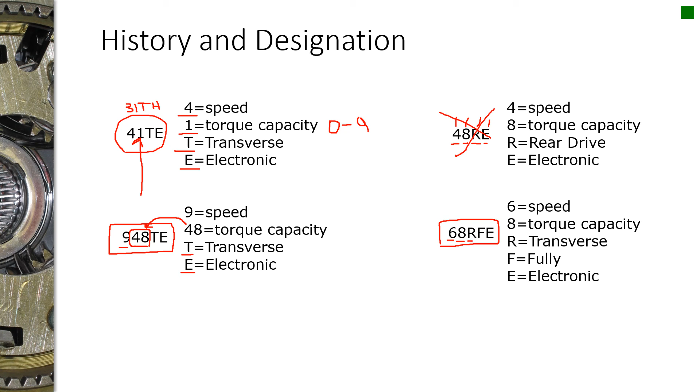I put this one up here because they replaced this 4-speed transmission with the 68RFE. It's a 6-speed, relative torque capacity of 8, rear-wheel drive, but they threw this F in here, and the F means fully. So the 48RE was an electronically controlled transmission, but it wasn't fully electronic - it had a throttle valve still.

Actually, the 48RE had an electric motor externally mounted, but like the 47RE and 46RE, the 44 and 42REs, they had a physical cable that went up to a throttle actuator, which changed the throttle valve in the transmission. So when they got rid of that cable, they added the F - instead of calling it 68RE, they call it a 68RFE, to let you know that's fully electronically controlled.

So it's a little confusing. I think when they went to it, they said, okay, we're going to have this common naming structure, and then as it went along, they kind of had to fall away from their common naming structure because they wanted to be clear.

And they've got other transmissions like the 42RLE. 42, 4-speed, 2 is the relative torque capacity, rear wheel drive is R, L longitudinal, so it's front-rear facing, and then E electronic.

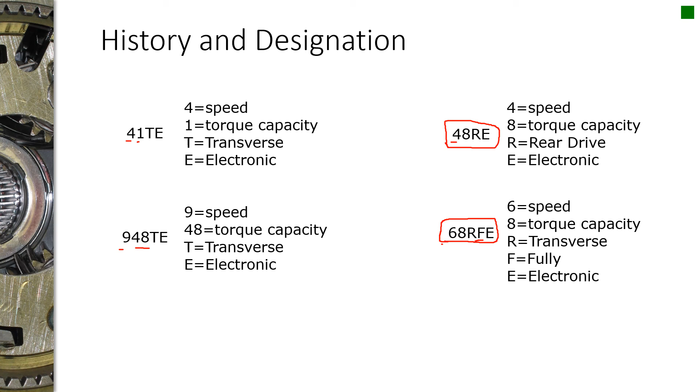But the big thing is that first number is the speeds, and the second number is going to be its relative torque capacity, whether it be 2 digits or 1. And then it's going to be transverse or rear wheel drive, or longitudinal if it has an L in there. Then E just means it's electronically controlled, which pretty much anything is going to be unless you get real dated with your stuff.

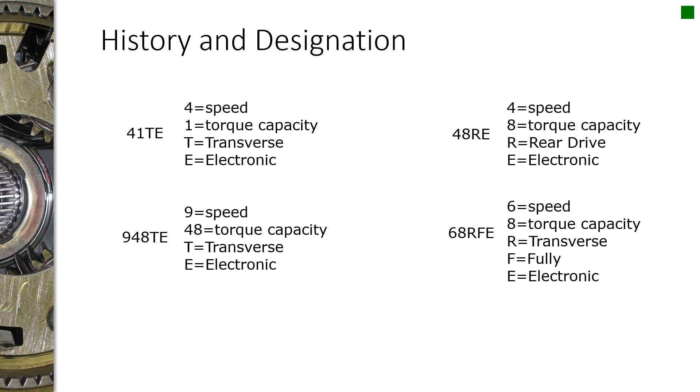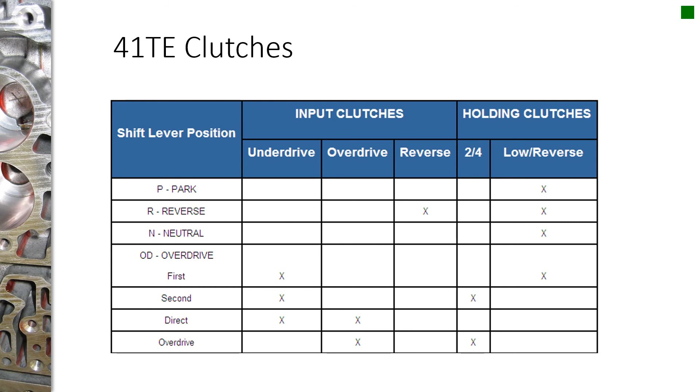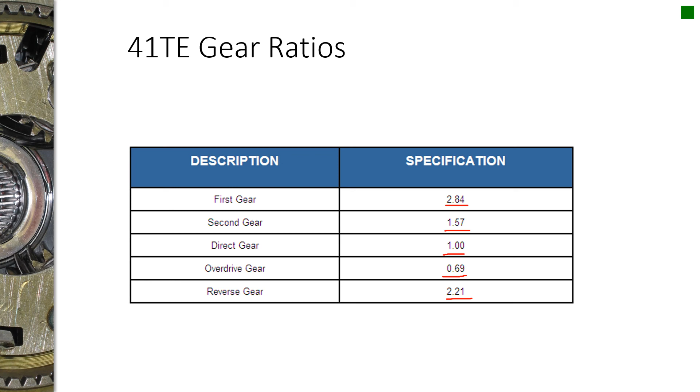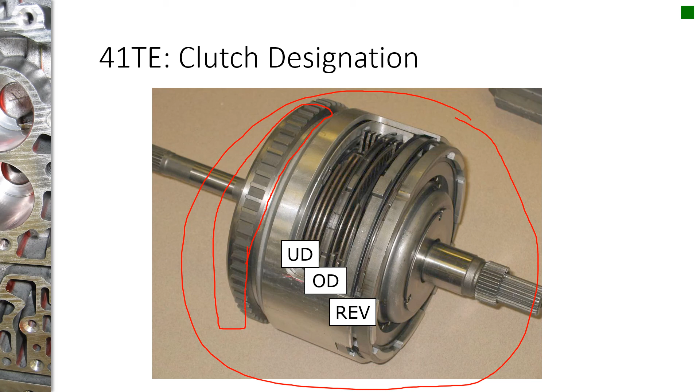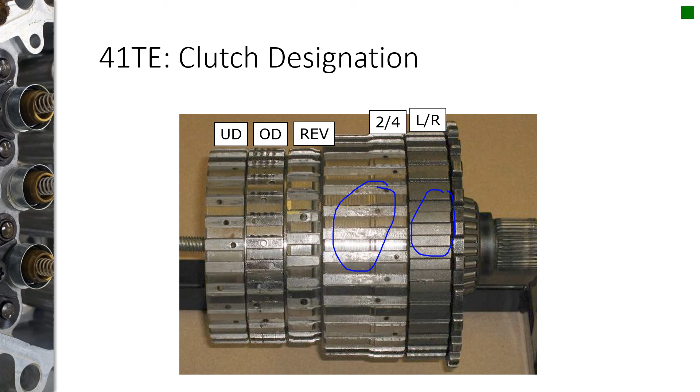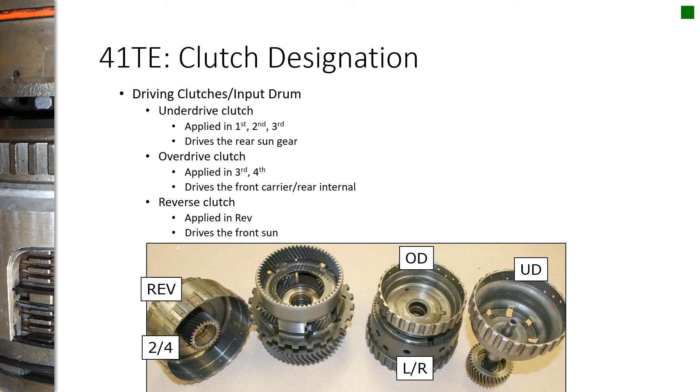As far as the holding clutches, this is the same picture we have on the bottom, but if you notice on the previous slide, I didn't mention the low reverse and I didn't mention the 2-4, because those are holding clutches. Those are going to take these gear set parts and lock them to the transmission case. Going back to those planetary gear set rules - if you input one part and hold a part, that third part's going to be the output, and it's going to be at some kind of gear reduction, overdrive, or reverse.

So looking at the 2-4 clutch, it's applied in second and fourth, and this larger set of splines that we have right here is going to house the friction discs. The friction discs are going to lug onto those splines, and when the 2-4 clutch applies, it's going to lock this front sun gear to the case.

Now if we look at the low reverse clutch assembly right here, it's got a larger set of splines as well, because they will take the friction discs between these set of splines and the transmission case. That's actually the very bottom set of clutches when we take this transmission apart. When that low reverse clutch applies, which is done in first and reverse, we're going to lock this rear internal, which is the back half, the rear internal, and the front carrier, which should be on the front half of the gear set. We're going to lock that to the transmission case so it can't move.

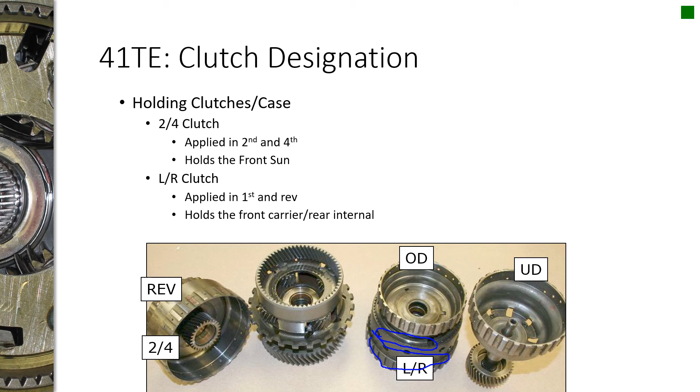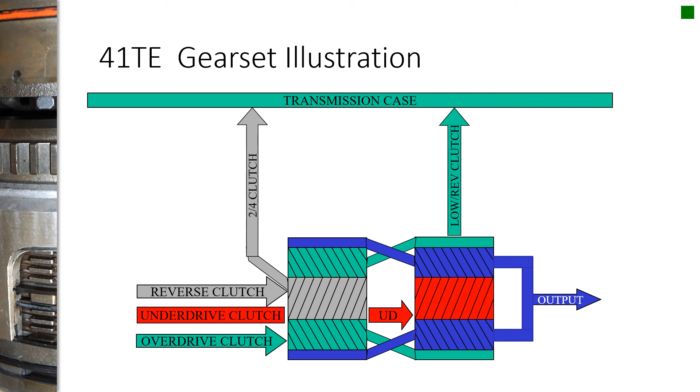But I'm going to go through and build it up piece by piece here on these next slides. As I mentioned before, our driving clutches are these three coming in from the left. The arrows coming in basically mean that my engine torque has the ability of literally driving those clutches through the torque converter. And then my holding clutch is the one showing arrows pointing towards the transmission case.

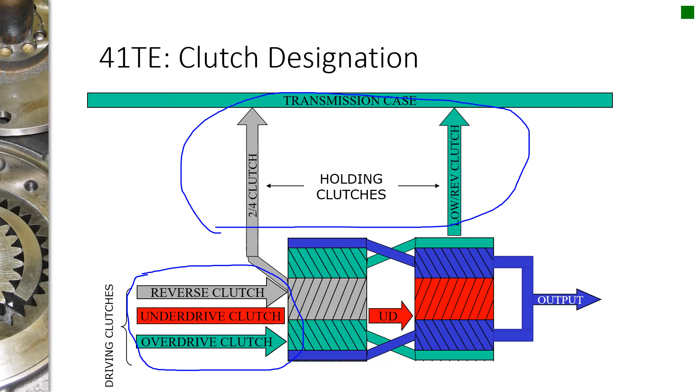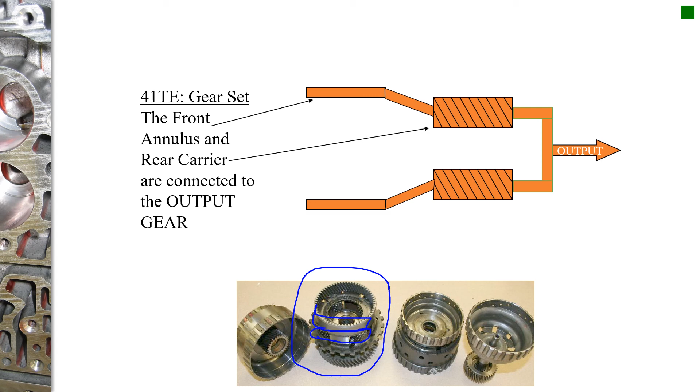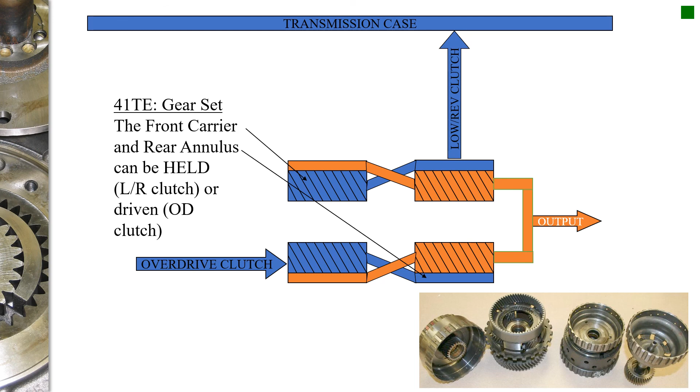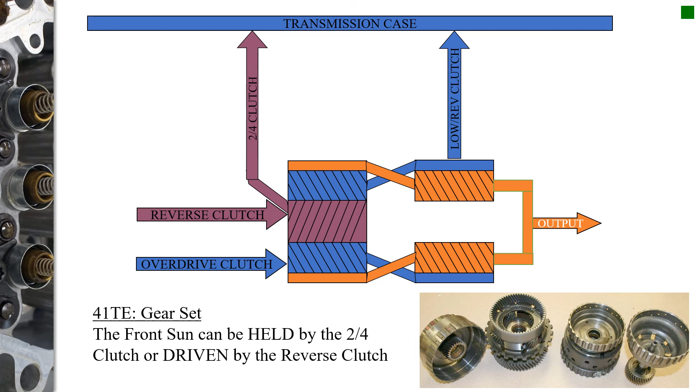Now the thing is, when I cover power flow on this transmission, it's much easier to explain using this drawing than trying to show it using just a big chunk of metal sitting there, especially when you have it all together. All you see from the outside are these splines, and you don't have any reference to what part of the gear set it's drawing unless you memorize that. So on these future slides coming up, where we go through power flow, I'll be able to point out what gear sets are being driven, what's being held.

For every gear except second gear, they're really only using either the front half of the gear set or the rear half. So it's really simple, it just comes down to a simple planetary gear set. Those rules we followed, where a small gear driving a big gear gives a gear reduction, a big gear driving a small gear gives an overdrive. If you ever hold the carrier, you're going to get reverse. Just these little planetary gear set rules - if a carrier's output, you're going to have underdrive; if a carrier's input, you're going to have overdrive. So it all really breaks down to some of those simple gear set rules, and we'll see that here on these power flow discussions coming up.

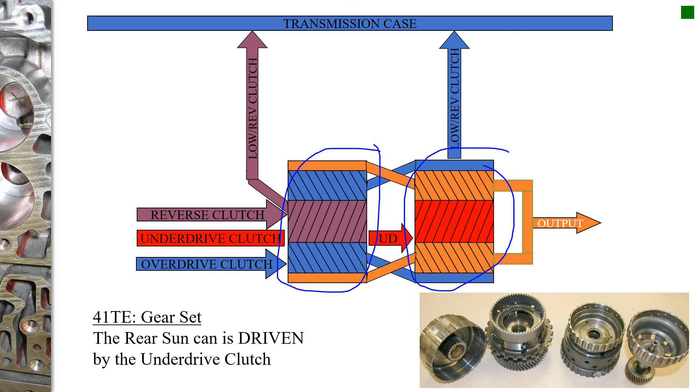So this transmission here is shown while we're in first gear, and the only thing that's applied is our underdrive clutch and our low reverse clutch. So torque comes in and drives this rear sun gear, and then we hold our rear annulus. So our sun gear is input, our carrier is output, and our internal gear is held. Hard to draw with a mouse, but it's a small gear driving a big gear. That's the best gear reduction we can get, or the smallest gear driving the biggest gear - that's the best reduction we can get, and that is what we use for first gear.

This front gear set, if you remember one of those gear set rules, said that if you have something applied or driven but nothing held, that's neutral. You have to either have two parts input, or something that's input and something that's held. Because if you have two parts input, you have direct drive. If you have something input and something held, you've got a gear reduction or an overdrive or something like that. But if you have something input and nothing held, that gear that's not being held is just idling along - it doesn't have any torque transferring through it.

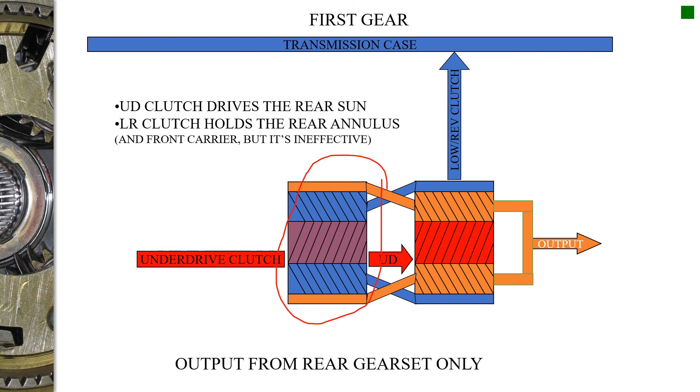Second gear is the most complicated as far as trying to understand power flow, but if you think about it: in first gear, my sun gear is input and my annulus is held. In second gear, all I do is activate this front gear set to let my rear annulus start to rotate a little at a certain speed. By not holding it directly, I steal a little of that gear reduction away, and that gives me what I have in this transmission as second gear.

So now here we are talking about second gear. Output is from both gear sets, so I need every gear in this assembly to work. When I was in first gear, I could literally be missing parts of my front gear set and still have first gear. But in second, I need everything available, because I'm holding a part of my front gear set through my 2/4 clutch, yet I'm still driving a part of my rear gear set through the underdrive clutch.

As I mentioned, in first gear this part was held, but now it's not held anymore—it's going at a bit of a gear reduction, rotating with the input shaft but not at input shaft speed. The rear sun gear is going input shaft speed, whereas the rear annulus gear assembly is going something less than input shaft speed. That causes the rear carrier assembly to rotate at a gear reduction, but not as good a reduction as first has.

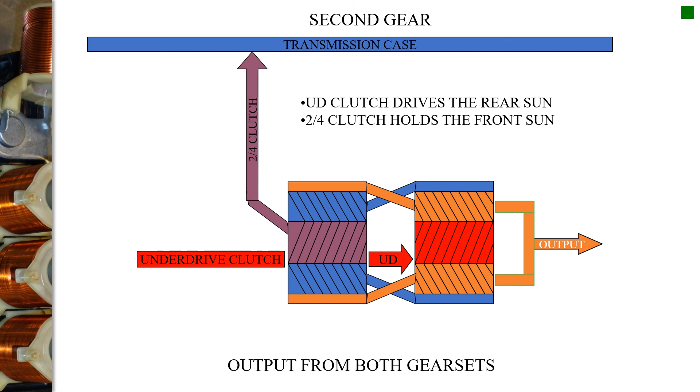Third gear is pretty simple. If you remember direct drive on a transmission, you have two parts input and nothing held. That's why we don't see anything connected to the transmission case here. I still have my underdrive clutch applied—even though they call it underdrive clutch, third gear isn't underdrive—and I'm literally driving my sun gear like I did in first and second gear. But now, after releasing the 2/4 clutch, I take my overdrive clutch and drive the front carrier rear annulus assembly.

So my rear annulus assembly is going input shaft speed, and my rear sun gear is going input shaft speed. That forces the rear carrier to go input shaft speed. I put that as output, and since the rear sun and the rear annulus gear are going the same speed, it forces the rear carrier to go the same speed—and that's direct drive.

And if we also stop, the way they achieve that is by releasing the 2/4 clutch and applying the overdrive clutch. That is the two clutches that they deal with when we shift from second to third.

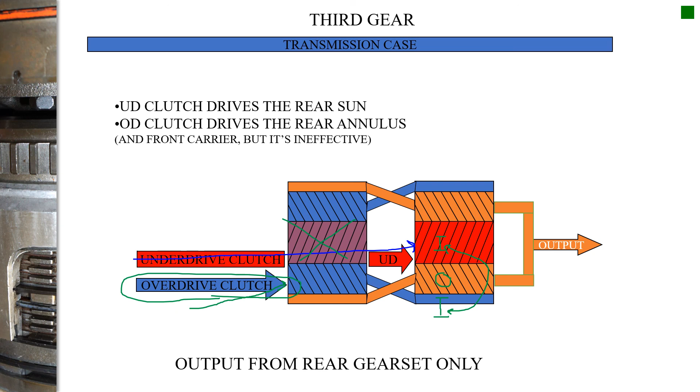Now we're in fourth gear, and the two clutches that they deal with for fourth gear is they will release the underdrive clutch, so now this isn't doing anything, and they'll reapply the 2/4 clutch.

And if we think of what half of the output is coming from, in this case it's going to be from the front gear set. So here I've got my front gear set. I'm holding a part of the front gear set with my 2/4 clutch. I am driving a part of the front gear set with my overdrive clutch, and then my output is going to be my front annulus assembly.

So in this case I could actually be missing parts of the rear gear set and I would still be able to get fourth gear, because all the planetary action that's occurring is coming from the front gear set, and it's just done with the sun gear held, the carrier as input, and the annulus gear as output.

This also goes back with our gear set rules. If the carrier is ever input, overdrive must result, and the reason why is because it's the biggest gear in the gear set. I know it's located inside the annulus gear, but it acts as the biggest gear in the gear set.

So if I'm ever having my overdrive clutch as the input, I'm going to have an overdrive as a result, as long as I have a different part held.

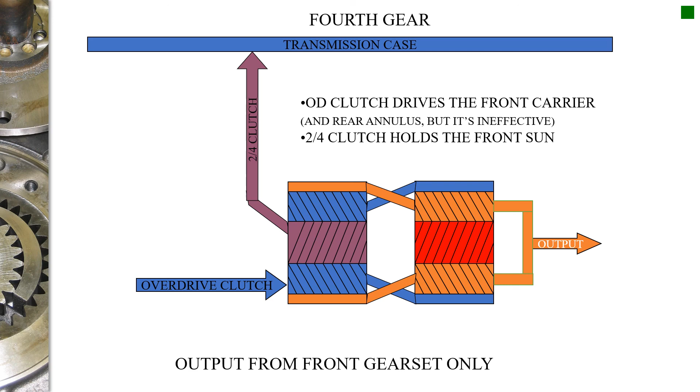And now we finish up with reverse. The output is actually from the front gear set on this, and this could be confusing to some because when you look at this, you're saying, wait a minute, I'm holding a part of the rear gear set here with the low reverse clutch.

But if you remember, everything that has the same color is the same connection here. So we're holding the back of the gear set right where the rear annulus is, but it's also connected to the front carrier assembly. And if you remember that planetary gear set rule, that if the carrier is held, reverse must occur, that's what's occurring in this transmission.

We're using the front half of the gear set. Our front sun gear is the input. Held is our front carrier assembly through the low reverse clutch, and then output would be our front annulus gear. So all of this action occurring in reverse is happening on the front half of the gear set.

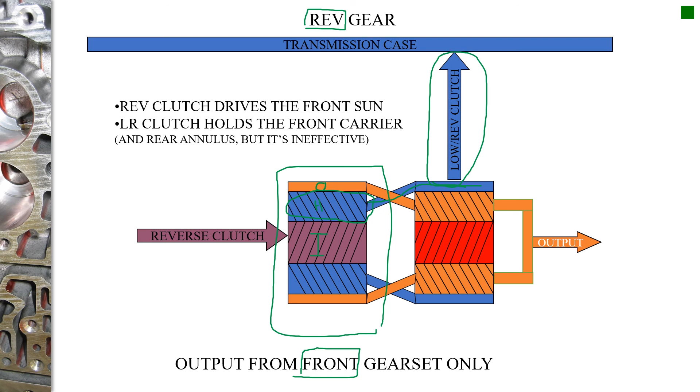So just as a recap, we have 3 driving clutches: our reverse clutch, underdrive, and overdrive clutch. Those are all located in the input drum assembly. And I have 2 holding clutches, and those clutches are located in the transmission case, and they are going to hold a gear set part, preventing it from spinning.

My low reverse clutch holds on to the rear annulus and the front carrier. The 2/4 clutch holds on to the front sun. Reverse clutch drives the front sun, underdrive clutch drives the rear sun, and my overdrive clutch drives my front carrier rear annulus assembly.

5 clutches, not too difficult to understand. No rollers, no one-ways, sprags or diode-type, ratchet-type clutches, nothing fancy, no bands. So it's actually a really simple, compact transmission.

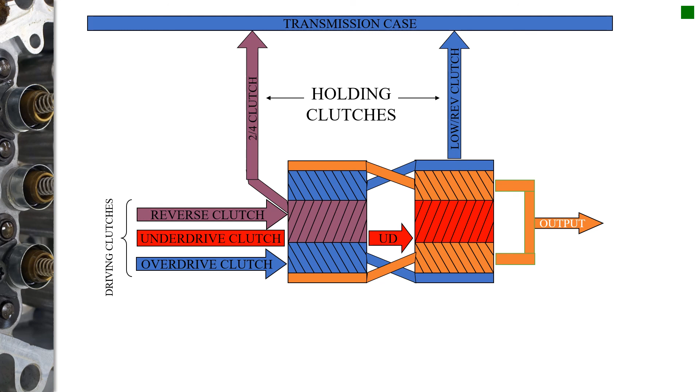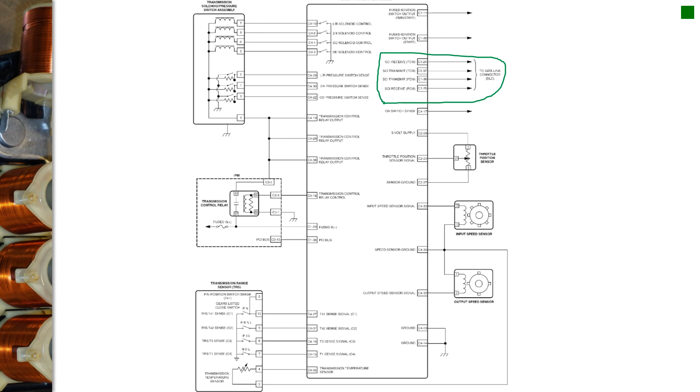But these transmissions throughout the years have pretty much used the same inputs and the same outputs, so even if I had a modern drawing, it wouldn't have changed. The reason why I like to use this one is because it puts the whole schematic with just the transmission related stuff on one page. So what you're going to see on these next slides is I'm going to have call-outs where I'm pointing out all these different little aspects of this schematic, and we'll talk a bit about them individually.

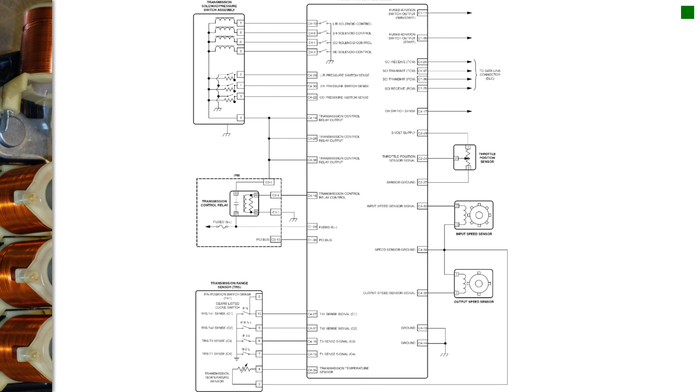As far as scan data and doing diagnostics, a lot of times the PCM will include the transmission functions. Sometimes you'll have a separate TCM. The earlier 41TEs used to have a separate TCM, and then around 2000-ish, the next generation controllers included the TCM functions in the PCM. That's pretty typical, pretty common. But with any given vehicle, you could find it's got a separate TCM and they just communicate to each other through a network, and that is what makes a difference between an ECM and a PCM.

If I have a PCM, typically you're going to have the engine control and transmission functions in that one module. If you have an ECM, you should have a separate TCM. ECM is engine control module, TCM is transmission control module. But regardless, it doesn't make a difference.

This is a topography that you would see using something like wiTECH, the Chrysler, Fiat Chrysler scan data. Here we can see we have a PCM, and they do have a TCM listed, but it's grayed out. If it's grayed out, that means it doesn't come with a TCM. So maybe they had a transmission option for this vehicle that utilized its own separate TCM. But in this case, we have a PCM, and it's going to include our transmission functions.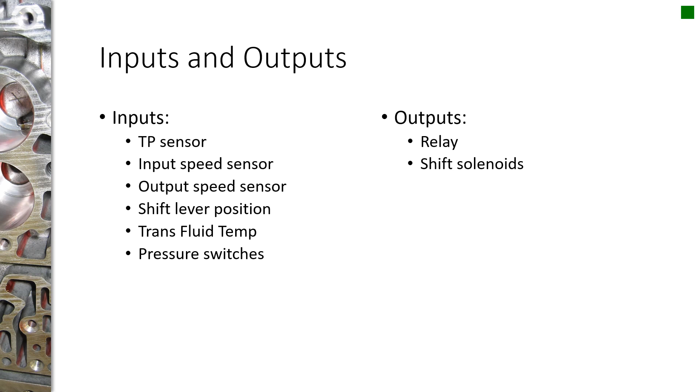If we were to start with the throttle position sensor—and you guys have, I'm sure, learned all about these things in previous classes, so we don't need to spend too much time on it—on a throttle position sensor, you're going to have power going to it, 5 volts in, you're going to have a ground, and then the little wiper blade on there sweeps across this resistor assembly, and depending on what voltage it picks up—5 volts, 4, 2, 1—depending on where it picks up on that voltage drop is going to be an indication of what your throttle position sensor signal is.

And how does it affect transmission operation? It has a big influence over its shift timing and the shift quality.

The difference between those two is the shift timing, which would be like miles per hour, as in what MPH did the transmission shift. You can imagine a throttle position sensor provides input on how much throttle you're giving it. So if I'm driving around giving it 10% throttle, my upshifts are going to be relatively early since I'm not looking for performance, just cruising through town. Whereas if I'm at 90% or 100% throttle, it's going to let the engine RPM climb much closer to its red line, its peak power and torque curves.

So the throttle position sensor is kind of an input to the load we're placing on the vehicle, and it will delay our shifts accordingly based on that. Shift quality is going to be along those same lines - it's the feel of the shift. Is it harsh? Is it soft? So when we talk about shift quality, we think of the shift feel, slipping or banging in the gears.

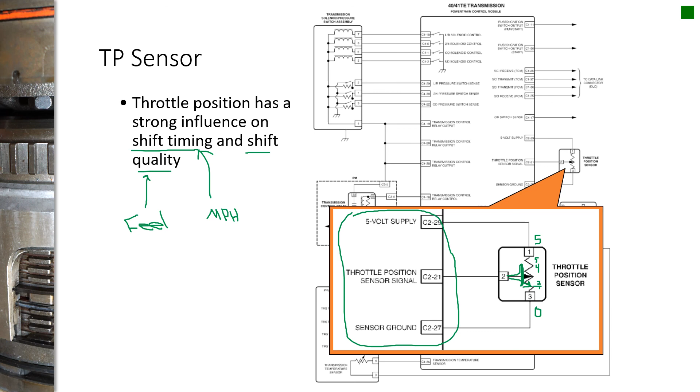As for vehicle speed, they don't have a vehicle speed sensor on this. They have what they call an output shaft speed sensor. So we've got a 24-toothed wheel right there on the output of this gear set. This is part of the output gear set right there, and you can see I've got a speed sensor kind of stuck to it. It's electromagnetic, a 2-wire sensor. So here's my output speed sensor and its wiring.

These little toothed wheels, when they pass by, there's a permanent magnet inside there. When they pass by that permanent magnet, it changes the flux lines, concentrating them or expanding them out when they're in the opening, and concentrating them when that little tooth goes by the tip of the sensor. The fluctuation of the flux lines in and out induces an AC voltage on our circuit. What the computer does is count the pulses - 1, 2, 3, 4 - and it can count how many pulses occur per second and translate that to output shaft speed.

Now here's the thing - different vehicles are going to have different tire sizes and so forth. So there's an adjustment, what they call a pinion factor, and that's a setting you adjust in the powertrain control module so you can correct for tire size differences. Because this output shaft speed sensor doesn't know if you've got tiny little 14-inch wheels, or 18-inch rims with some decent sized tires.

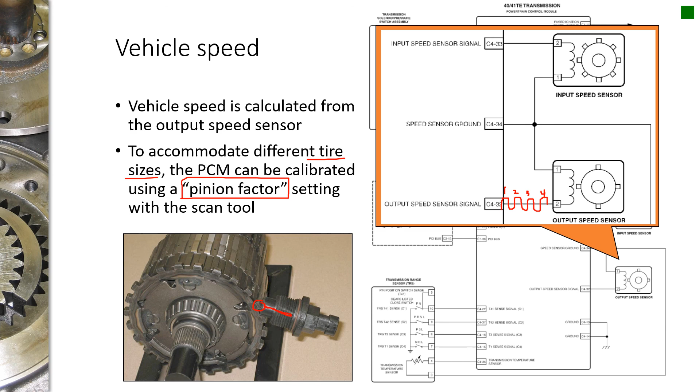More on the speed sensors, we also have an input shaft speed sensor. Same thing, a 2-wire variable reluctance sensor, and it measures off the 60-tooth reluctor ring on the input drum, so we have a direct measurement for input shaft. The input shaft generates 60 pulses per revolution.

The output sensor generates 24 pulses per revolution, and they're both variable reluctance, 2-wire sensors. This actually used to be one of the biggest problems on these 41TEs.

The output speed sensor would fail and just refuse to put out a signal. It was horrible if it did that at highway speeds, because as soon as it failed, it thought you were going 0 miles per hour and it would downshift you into first. There are no one-way roller clutches or sprags, so you actually went to first gear.

But usually the symptoms were at low speeds, where somebody would be driving along and the output shaft speed sensor would fail and drop them into first gear.

We still have these two speed sensors, an input speed sensor and an output speed sensor, but one thing we need to take into consideration too is that we have an engine speed sensor, the crankshaft position sensor, so they can compare engine speed to input shaft speed to figure out what's happening in the torque converter clutch, and then compare input shaft speed to output shaft speed to figure out gear ratios.

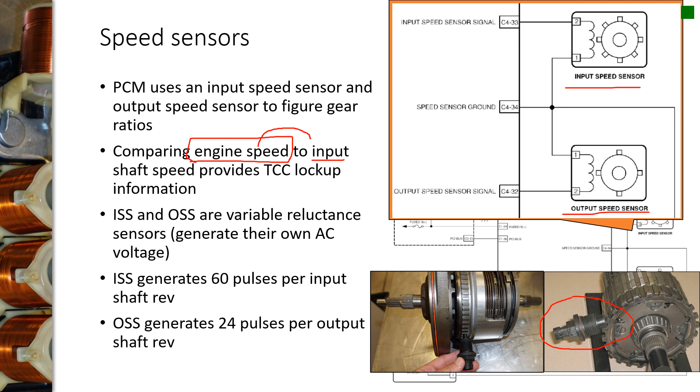These right here are DTCs that will set because of a speed sensor; 715 and 720 identify speed sensor errors. These, 736, 731 through 736, identify gear ratio errors. So 731 would be a gear ratio error in first, 732 would be gear ratio error in second, and so forth, with 735 or 736 for reverse. They've got all the gear ratio error stuff figured out through these codes.

The way they're figuring out these gear ratio errors is by looking at the input speed and the output speed. When they command, say, first gear, and it should be 2.73 or whatever, if it doesn't get that ratio, it knows there's something slipping, and it'll flag a code.

The 740 is a torque converter clutch circuit or failure code. If you have one of these codes, like a gear ratio error code, you'll almost always have this right after it, or along with it: P1790, fault after shift. If you have a gear ratio error, it'll set a 1790 as well, which basically says we commanded a gear, it didn't work, and we didn't get the gear ratio we expected, so we got a fault after a shift.

So really, when you look at this diagnostics, you're going to be looking to see whether you have a gear ratio error, a pressure switch problem, or something else occurring that's causing a problem.

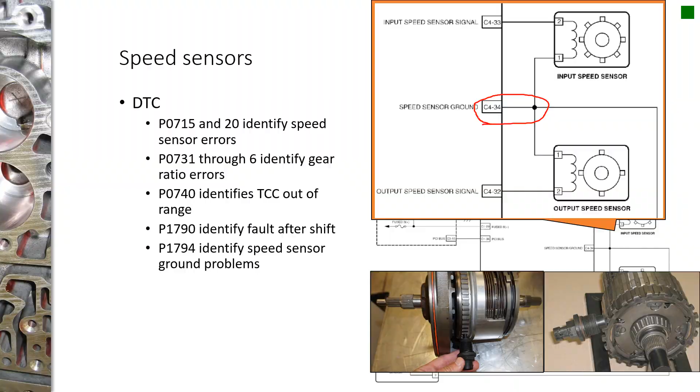These next slides talk about the transmission range sensor, and what the range sensor's purpose is to let the computer know what range we've selected: park, reverse, neutral, drive, low, so forth. And also the transmission fluid temp, and also give us information for reverse backup lamps and also the park neutral start safety switch.

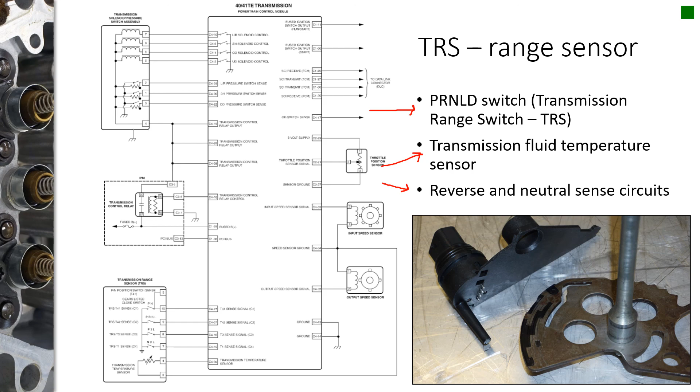On the scan data, we see these 4 circuits here listed as an input, and they're either going to say closed or open depending on the switch state. And it says like T41 C1, T42 C2. The reason why they have both of those is because depending on the wiring schematic you're looking at, they might identify as T41 or C1. So it just kind of makes that simple.

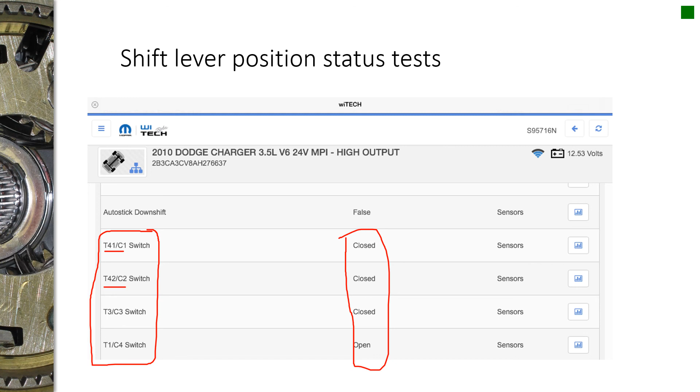But between these 4 switch circuits, we can figure out what manual valve position we're in.

This is the thing that Chrysler or FCA wants you to do when you're diagnosing these 41 codes. It is the very first step of diagnostics, and I bolded or capitalized the word first here. They want you to do this very first, is to go through and do what they call a shift lever position test, because they don't want you to go down a dusty road trying to find a transmission issue when all along you had a bad range sensor and it was telling you that you're in manual second or you're in neutral or something like that, and you weren't actually in those gears.

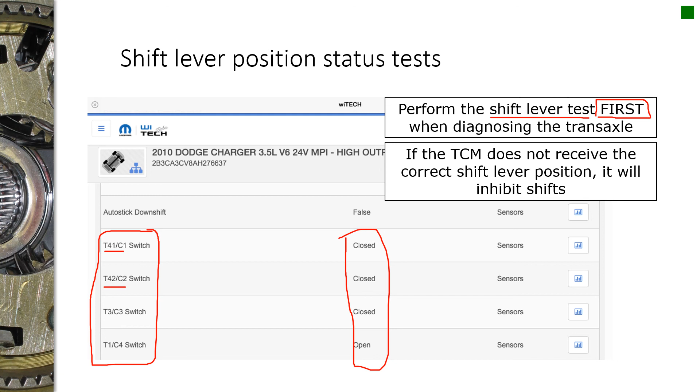So, because the TCM doesn't receive the correct shift lever position, it's not going to give you the gears that you're expecting. If you're expecting overdrive and it thinks you're in 3, it's only going to give you first, second, and third.

There's actually more than one way you can check this. One is the scan data. If you go into special functions or miscellaneous, you can actually do a shift lever position test, and it'll tell you shift into park, hit enter, shift into neutral, hit enter, shift into drive, and they actually have you go through, and then when you're done, it tells you if it passes or fails.

But you could also go through and monitor the switch states and see if they're opening and closing. And thirdly, you could look at the PID that would basically tell you your gear selection and see if it's changing accurately between park, reverse, neutral, drive, all that good stuff.

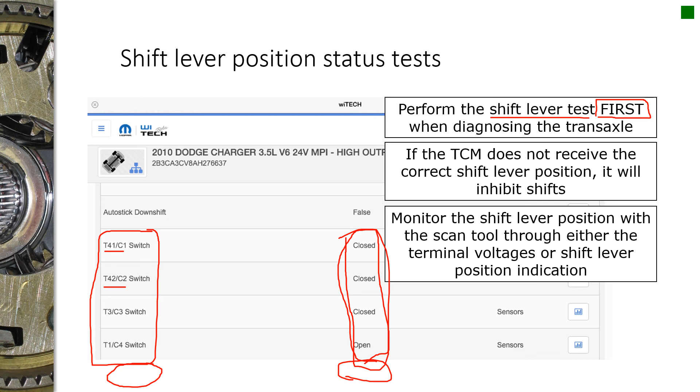But do this step first before you start diagnosing a transmission. Just verify that it's getting the proper signals as far as the shift lever position status.

This is the layout, I guess you would say, of how the switch is set up. It was actually different when these transmissions first came out, but from '96 to the last, when they stopped making this transmission, they pretty much stuck to this little sequence here. Now if you look, I've got what's a sense signal circuit. They put 12 volts and they go through a resistor.

And they go into that little signal circuit. So I'll have 12 volts on the circuit so long as the switch is open. As soon as the switch grounds and I find myself a path to ground, then I'm going to drop all that voltage to 0. So imagine a resistor, 12 volts, a resistor, and then a tiny little voltmeter in front of every one of these circuits.

So every one of these would have a little voltmeter and a resistor. And then if you look on the side here, they will tell you when those switches close. So that'll close in park and neutral. This will close in park, reverse, neutral, and low. This will close in park, third, and low. And then this will close in neutral, drive, and low.

So I get my 4 little switches. If I look at this picture on the side, these are the terminals, and they're like spring loaded with a little plunger on them. And you might not be able to tell, but you can see where they've kind of been riding on this little plate.

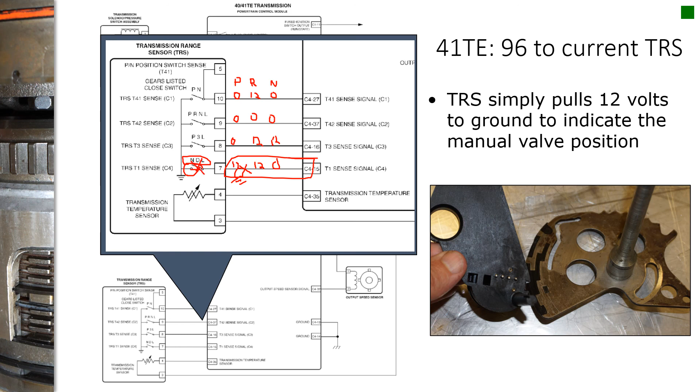So if I'm diagnosing this vehicle and I find that I've got a bad range switch, maybe something's saying 12 volts all the time or something's saying 0 all the time, I might have a bad switch or a short to ground, or if it's staying 12 all the time, I might have an open in the wire or open on the switch. But that gives us an idea of how it works so that maybe we can diagnose it properly.

Like I said, here is the chart: park, reverse, neutral, D3. These transmissions don't have like a D4, D3, D2, and low. They usually have overdrive, D3, and then low. They skip 2 for some reason. I don't really know why.

But now some of these vehicles will have auto stick, so you can go to a manual mode option, but the ones that don't have auto stick and just shift through it, these are usually the 6 options that you get.

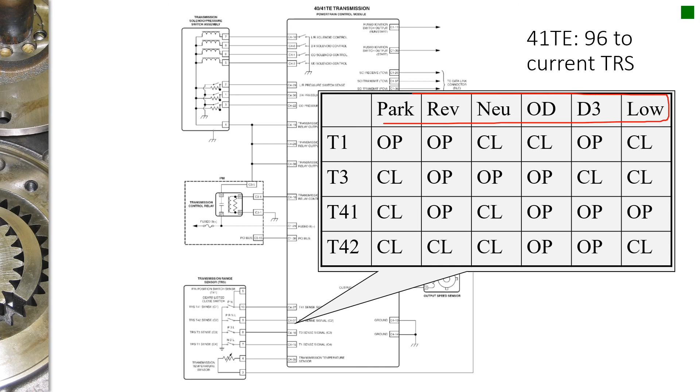There's also a thermistor in there, and I've mentioned that before, but that little stub right there is a temp sensor built into here. So there's a little wire there, a little temp sensor, and that's represented by this on the schematic. So it's a negative temperature coefficient. The resistance drops as the temperature increases, and it will change the voltage on that wire. And based off of that voltage, we're going to be able to figure out what operating mode or what strategy we're going to operate this transmission in.

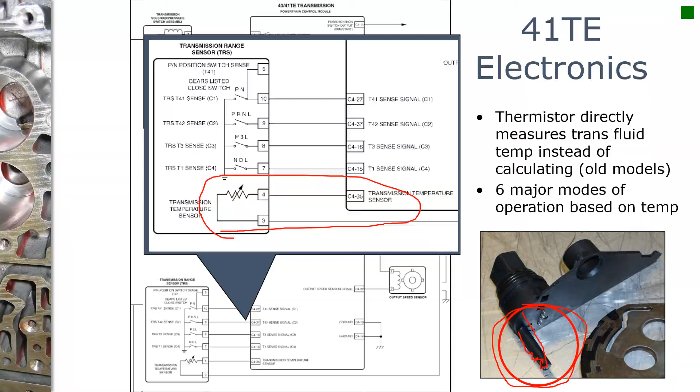These are the 6 basic modes of operation. I know these numbers don't quite line up perfectly, but this is what they've got published in their books, so it's what I have put up here. They've got this extreme cold function and relay open limp mode, meaning they operate this transmission in limp mode, and when they turn the relay off, they turn the power off to all the solenoids, and when you do that, you've got second gear, you got park, neutral, reverse, and second gear.

That's it. The reason why they do that is these solenoids are in such charge of the fluid flow that they don't want to, with it being negative 16 degrees, have the fluid react unexpectedly, and they know they won't be able to control it through the solenoids properly. So they just leave you in second gear. They are not going to try to shift the transmission until you get warm or warmer, because the next phase is cold, and it says below negative 12 degrees Fahrenheit, but I don't know, those 2 numbers are pretty close.

Like I said, this is what's published, but when we jump up to warm, it says 36 to 80. I think it's probably 12 to 35 degrees, which would make sense. Whoever wrote this in their books kind of didn't proofread that, I guess.

In cold mode, it delays their upshifts and has quick downshifts, and they don't turn the torque converter clutch on. You can imagine why - they're going to try to get heat in this transmission and engine as soon as possible.

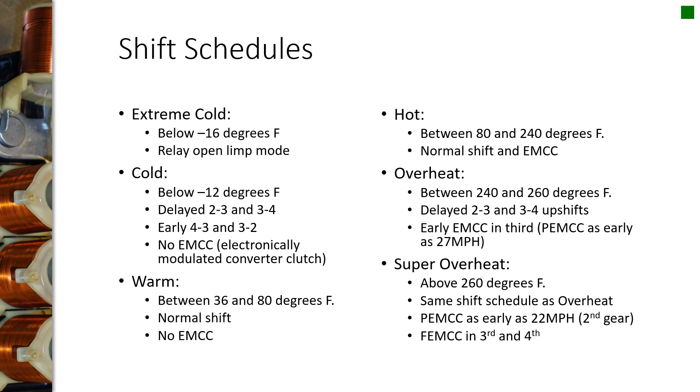And then what they don't have listed here is super duper overheat, and that is when they basically pull the car over, open the doors, and you're supposed to jump out because the car is going to burn down. But okay, so there's no such thing as super duper overheat, but still a lot of different shift temperature modes.

So why would you have improper shift schedules? Well, if you have extreme cold or cold schedules and you're not actually in that environment, you might want to look at the temp sensor circuit resistance. If we have excessive resistance, it's going to translate that to colder temperatures than it probably really is. Now in theory, they do these deltas where they look at this temperature, intake air temp, engine coolant temp, and all these different things, and they should be able to say something's not reading right and set a code.

But if they don't, that's something easy to check just by looking at scan data. The causes for the overheat or super overheat: high engine idle. The only way that would really cause it is if you're sitting in traffic a lot with your foot on the brake and your engine idles high, like if you bump it into neutral or park, it'd be revving up at like 1800 RPM or something. Because if you're sitting there in drive with all this engine speed that wants to occur, you're basically stall testing your converter.

And you're going to be creating a lot of heat in your torque converter. Trailer towing, meaning if you're giving a lot more throttle for just cruising and everyday driving, your torque converter clutch is likely going to disengage more frequently for the assistance, torque multiplication, and so forth. And that translates to extra heat because of what's happening through the torque converter.

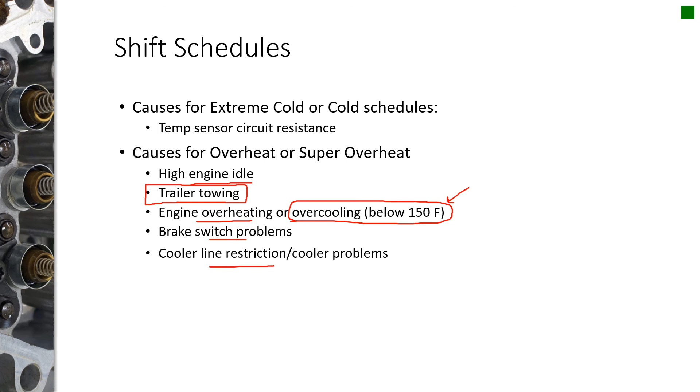But like I said, I don't really see these things, the overcooling part, happening too much. All these other things do make sense, especially depending on how you drive it. Engine idle, yeah, okay, especially if you're in stop and go traffic a lot. Trailer towing is obvious - if you know you're going to be pulling trailers, no matter what transmission you have, it always makes good sense to put an external, auxiliary cooler on it. Engine overheating makes good sense, the restrictions and brake switch problems too. The overcooling, okay, maybe I'd have to be proven that, but they do put that in their literature, so I feel it'd probably be a good thing to include on the chart or slide.

So those are all inputs. We looked at the pressure switch assembly, the input speed sensors, throttle position sensors, and all that good stuff. Now let's think about some of these outputs.

There's only a relay that we look at, and then these solenoids, the solenoid pack. This transmission utilizes 4 solenoids, and looking at the wiring schematic, you can see it's a low reverse solenoid, 2-4 solenoid, overdrive solenoid, and underdrive solenoid.

There's 5 clutches in this transmission though, so the one they left off is reverse. And you can, I'm trying to spell reverse here, kind of imagine what they're going to do about reverse.

Because reverse is only applied when I shift the transmission into reverse, do I need to be turning it on and off electronically? Probably not. If I just let the reverse clutch apply by shifting through a manual valve movement, when I physically shift my shifter into reverse, it moves a valve in the transmission and opens up the passage to the reverse clutch.

That's exactly what they do, because it's not what we'd call a shifting clutch, where it has to come on and off, like when we're going from first to second, second to third, third to fourth — releasing a clutch, applying a clutch. We don't have to do that on the move with reverse, so they can let that function be taken care of simply by the manual valve shift.

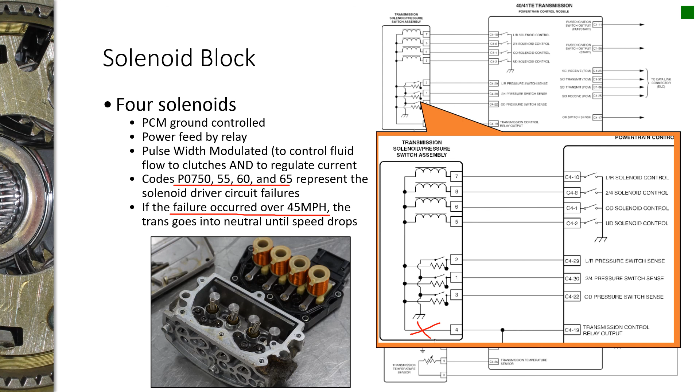This is one of the things you'll see when you're looking at these solenoids on a scan tool. It's kind of neat - the PCM will monitor these by pulsing about every 10 seconds or so. They'll turn the solenoid on and then back off, and they'll look for an inductive kick.

If you've been through engine performance class and learned about fuel injectors and ignition coils, you know that when you create a magnetic field and then remove power from it, the magnet collapses. If you power up a coil, you create a magnetic field, and when you unplug that coil, that magnetic field collapses around it and induces a voltage into that circuit.

That induced voltage will spike up, especially if it doesn't have a path to flow - if it's not grounded out, or if I don't leave a jumper wire to jump the leads together. When it's disconnected, as that magnetic field collapses, the flux lines cut across the conductors and induce voltage into those coil windings, creating a high voltage kick or spike.

If I've got a bad coil, I won't create that kick - if I have an open coil, I won't be flowing current. If I have a shorted coil, it would bypass those windings and not create a strong magnetic field. Or if I have high resistance in the circuit and can't get a strong magnetic field, when I shut it off I won't have a strong inductive kick.

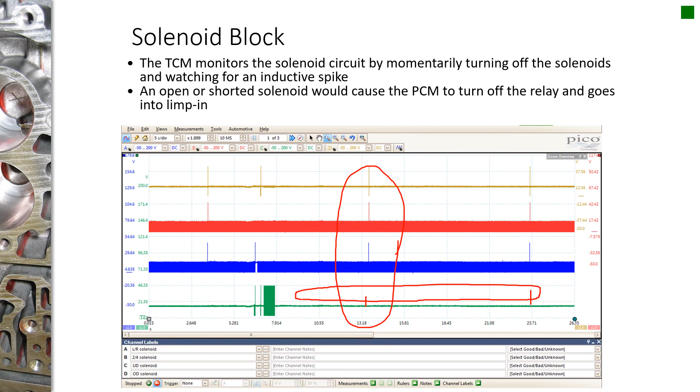On our scan data, we can see the activity of what's going on. They still kind of have this messed up a little bit - when I was taking these screenshots, they called everything a sensor, even if it was a solenoid or whatever. Everything was called a sensor. I haven't checked recently to see if they fixed that, but for well over a year and a half, they hadn't changed it.

Another thing I thought wasn't very good on their part, which hopefully they get more specific with - they say low reverse, low lockup clutch, 2/4 kick down, low reverse clutch, overdrive clutch. It makes you think you're looking at these clutches, but these are all solenoids. They need to put the word solenoid behind it, because applied and not applied refers to whether that solenoid is on or off - in reality they should just say on or off instead of applied or not applied.

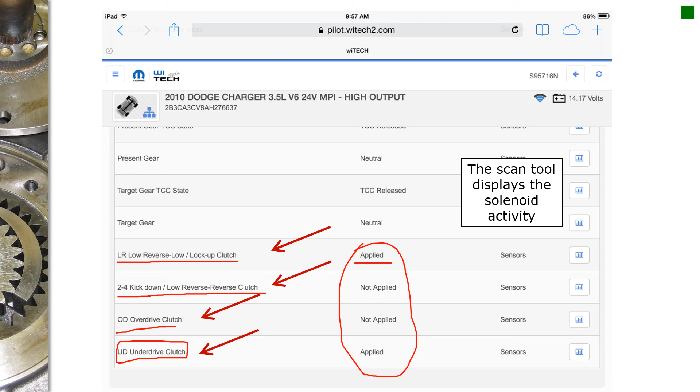In these solenoid pack assemblies - I took one apart, and in these three pictures you can see it disassembled. These are the coils, as you can imagine - those are the four solenoids: low reverse, 2/4, overdrive, underdrive. And then these little plungers right here.

Those are the pressure switches - I have three pressure switches. When you take the plunger off, you can see there's a brass plug and a spring, and what you can't see very well is there's another brass ring in there. So these springs push the plungers away from the brass ring, and when you get pressure in there, it pushes the plungers down and makes the edge of the plunger contact the ring, which grounds the circuit out.

I know it's kind of a weird way to draw all this stuff, but if you flip this over, the springs are right here, and they're holding these plungers off of the seat.

And then once pressure comes in and pushes that plunger down and lets the edge of that plunger contact the seat, through the little plunger and the spring, they're able to ground it out right to the cover. So that's how it works internally.

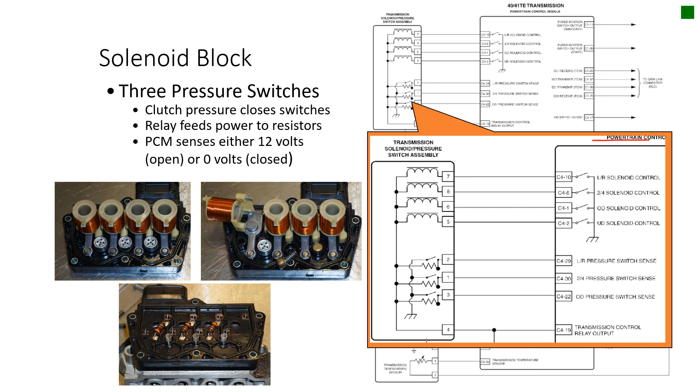Here we see our pressure switches. They've displayed on the scan data. They're showing them as open or closed. So if you're having an issue with a pressure switch error, you can look at your scan data here and see if that state ever changes. Now realize that these are the pressures that we need to be in low or reverse for this pressure switch to close.

And actually, hold on a second. Now I'm thinking about it. Actually, it only works in low. They shouldn't call it a low reverse pressure switch. It's really a low pressure switch. And the 2-4 pressure switch will only close when I'm in second or fourth. The overdrive pressure switch will only close when I'm in overdrive. They don't use an underdrive pressure switch. I don't know why. Maybe they ran out of wires.

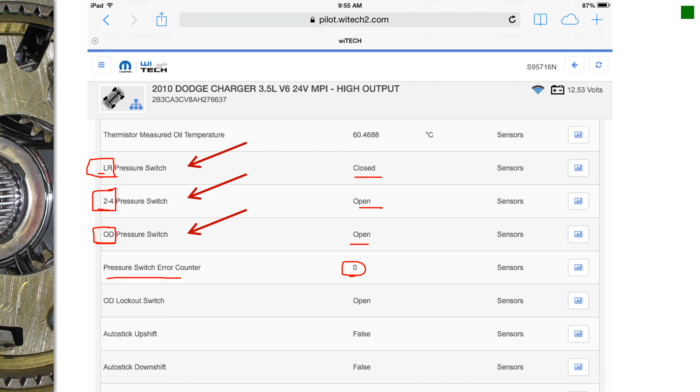So they have an error counter, so they're not always going to freak out if one of these things flicker on and off. There's, I'm sure, situations where bad connections are made, but they do also have an issue with these transmissions of setting mismatch codes where the pressure switch is either open or closed and it shouldn't be, and those can cause transmissions to fall into limp mode, come back with codes, and a lot of technicians struggle with those codes. A lot of times they end up falling back to either one of two things: poor connections, not necessarily in the transmission, but the connector itself. And then the other possible problem is valve body wear. When you get cross leakage occurring because of valve body bores being worn out and so forth, they can erroneously cause the pressure switches to open or close when they shouldn't be. And we'll see more of that when we look at the hydraulic side of things too.

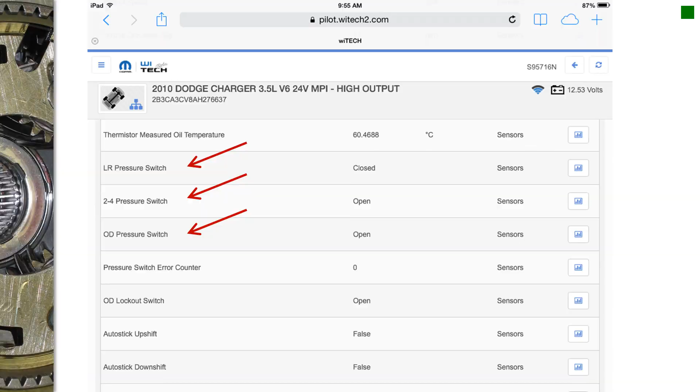More on the solenoid block there. It takes about 20 psi to close those pressure switches. And we do have these DTCs, as I mentioned. The sense circuits could throw these 3 codes, and if I've got pressure related codes, or if they suspect that I'm not getting hydraulic pressure when I should for these particular gears, they could set those 3 codes as well for pressure failure.

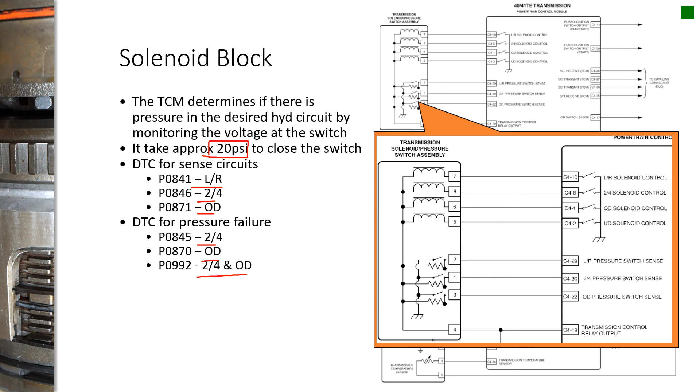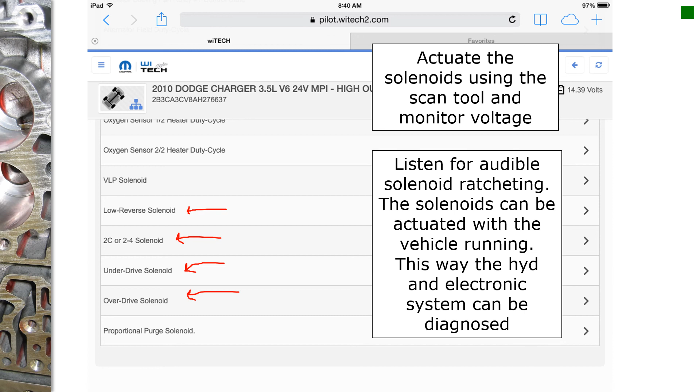And this screen right here is showing an example of the low reverse solenoid. It's toggling it on and off 1 second at a time. So it's on for a second, off for a second, on for a second, off for a second.

Here we're looking at the transmission relay. Relays aren't that complicated, but they have a few inputs to let it know that after the relay closes, we've got voltage finding its way through. If they command the relay open and it still sees voltage, it'll set a code for powering up all the time, relay stuck closed, or short to voltage. Or if they never see voltage and command this relay on, that would be a bad relay, an open circuit or open relay contacts.

It's a power side controlled relay. So they put 12 volts out to it from the PCM or TCM, and that energizes it with its own external ground. That way they're limiting the amount of potential failures. If you're going to have a short to ground, in this case it would not energize this function at all. Whereas if it was ground controlled by the PCM, a short to ground would leave the relay on all the time.

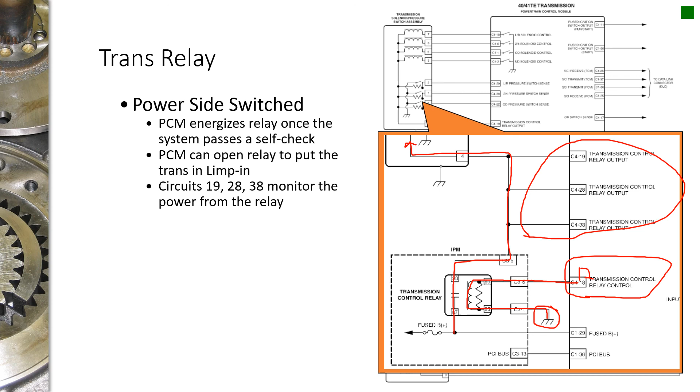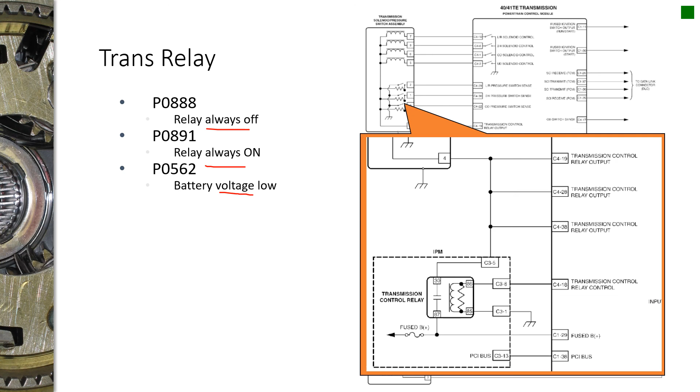So this is a way to control power to the solenoid pack. We've got power coming in through the relay, some sense circuits, and then this goes right into that solenoid pack and powers up the solenoids and pressure switches. As I mentioned before, we've got relay always off, relay always on, and even low battery voltage. They can sense the battery voltage and set a code for it too.

Here we're going to talk about clutch volume index, and this is FCA's fancy term for shift adapts or transmission adapts.

CVI, as its name implies, clutch volume index, is a number that represents how much fluid it takes to fill this clutch assembly up before the clutch actually starts to apply. The idea is if I energize a solenoid—and this is where the pressure switches come into play too, remember the pressure switch closes at 20 psi—if I fill a clutch assembly up, let's pick overdrive for example. If I energize the overdrive solenoid and fill up the overdrive clutch, by the time that pressure switch closes, I know I've filled the whole clutch circuit with ATF, the piston has moved and taken out all the clutch pack clearance, and the accumulator hasn't really started to stroke yet.

Because at about 20 psi, I've taken up my clutch pack clearance, filled all the circuits with fluid, and I'm just about ready to stroke my accumulator. At that point the pressure switch closes, and the computer now knows how long it took for all that to happen—from when they commanded the solenoid on to when the pressure switch closed. That's a piece of information telling them how quickly this clutch circuit filled, without stroking the accumulator yet, while moving the piston into contact with the clutches and taking the clearance out. From there, they can tweak the transmission solenoids to get the shift quality where they need it.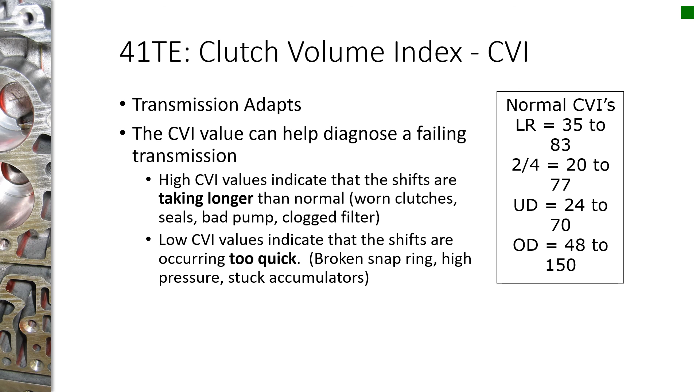So you can imagine if we're diagnosing a transmission and the customer comes in and says, yeah, this thing seems like it's slipping, that doesn't feel right—well, I could look at those CVI numbers and say, yeah, that overdrive clutch is maxed out on its CVI, way up there at the maximum of its adapts. You're not necessarily setting a code and you're not in limp mode now, but yeah, this thing's probably on borrowed time. So the CVI values, the adapts, are a pretty good indication of how this transmission is wearing.

Now, whenever you go to rebuild a transmission, you need to reset all these, because it takes a while for this stuff to learn. If it was adapting to a slipping transmission and then you fix the problem, it's going to be slamming hard into those gears next. So if you reset these, it normalizes the numbers and then it can learn—that's the process called Quicklearn.

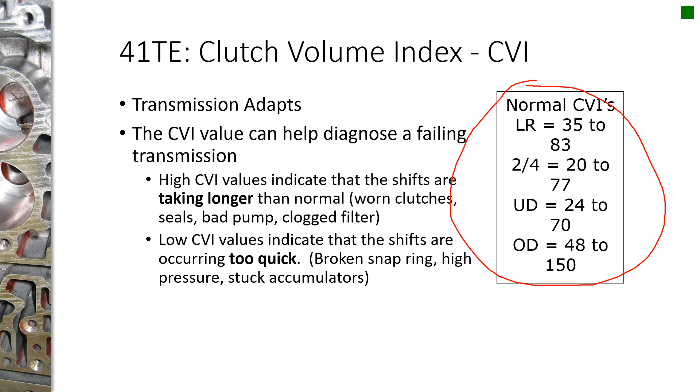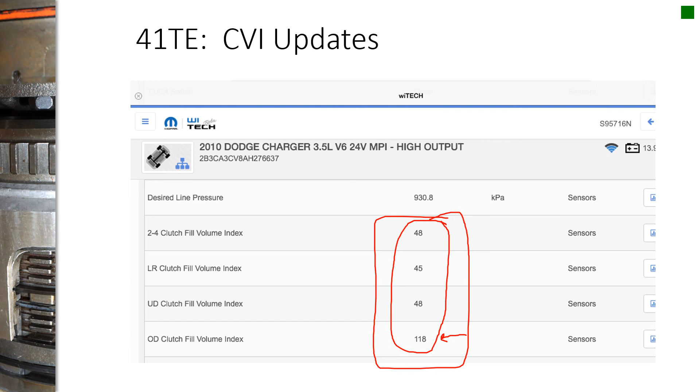Here we see the CVI on this charger we have in the lab, and these numbers aren't too crazy. I don't like how they have their numbers because they're hard to memorize, but the overdrive looks high—though if you remember, I think that one was allowed to go as high as 150, so it's probably not too bad. Most of them were between like 30 and 70, so this falls in that kind of range. So you could look at the CVIs for a transmission and get an idea if you're at the extremes of one of them, that maybe you have a problem with one of those clutches.

When do they update? This is the thing—they don't constantly update, like we think of fuel trim on a vehicle where you're driving down the road and it's always providing an update looking at the O2 sensor, always tweaking. Short-term fuel trim follows the O2 sensor, and if it learns a trend it transfers that to long-term fuel trim. Well, they don't really do that on these. They concentrate basically when a clutch is going through a shift. When we're shifting, I'll use underdrive as an example—underdrive is applied in first, second, and third, and it releases in fourth.

So really the only time underdrive is going to update is when we're downshifting from fourth to third or fourth to second. We look at the first time that clutch goes from an off state to an on state, and they'll adapt off of that.

So here, the low reverse CVI is going to update on a 2-1 or a 3-1 downshift. It'll only do it, this is weird, they don't all do this way, but they'll only do it between 70 and 120 degrees.

My low reverse clutch is applied when I'm in park and neutral and shift it into first. It's already applied, so they don't want to update anything if I'm moving my manual valve or doing any of that. Once I shift out of first into second, maybe third or fourth, the first time the computer is really in charge of applying that clutch is when I'm slowing down to a stop sign or stoplight and go to a 2-1 or 3-1 downshift. Then the computer's in charge of it, and it can look at how things happen and adjust the CVI based off that.

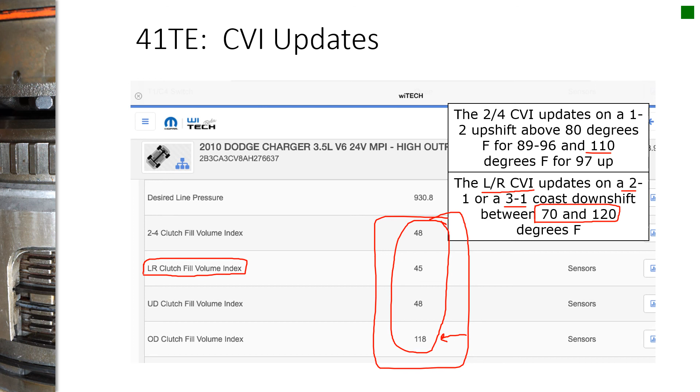The underdrive clutch, as I already mentioned, the first time will be on a 4-3 or 4-2 downshift, because the underdrive clutch is applied when I shift into drive, but they're not going to want to update it on anything where I'm physically moving my manual valve. The results would probably be too varied depending on how I'm shifting it. So the first time the computer's in charge of shifting the underdrive clutch would be once I'm in fourth, the underdrive clutch is released, and I downshift into third or second. That's when the computer is actually applying that clutch, and it can base its information off of that.

Finally, the overdrive CVI is going to update on the 2-3 upshift, because that's the first time I shift from second to third. That's the first time I go from an off state to an on state with my overdrive clutch.

Those are CVIs, clutch volume index, and they will update for the most part. Other than the low reverse, they'll always be updating when you're driving on the road and occurring these shifts, when the clutches go from an off state to an on state, and the computer's in charge of it.

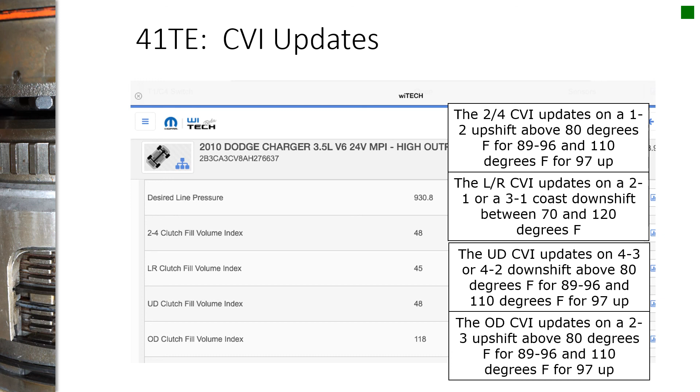They do have a Quicklearn function, and I mentioned that a couple slides ago. When you do a Quicklearn, it's because you've changed some of these parts that could affect the shift adapts. Anything that could affect your shift adapts, you'd want to go through a Quicklearn. So rebuilding your transmission or replacing a transmission, replacing the solenoid pack. If you went into the transmission and replaced the valve body or overhauled it, bored it out, put new valves in, put a shift kit in it, whatever. Anything you've modified on this transmission that could potentially affect how it's going to shift, you're best off going in there and doing a Quicklearn.

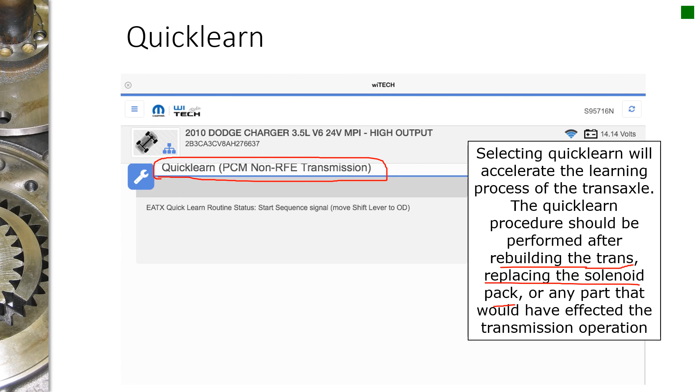Should you do a Quicklearn if a car comes in and these adapts are out of range? Should you do a Quicklearn and reset them? Probably not, because that transmission's been adapting over time and got to those numbers. If you don't fix the transmission or take it apart, or at least attempt to fix something, there's no point in Quicklearning it, because it'll probably operate worse until it can adapt back to where it was. It's kind of like if you were to reset fuel adapts without changing anything in the engine management or fuel injectors, fuel pump, whatever. Resetting the fuel adapts won't accomplish anything because the problem still exists.

These last few slides cover later adjustments made to this transmission. You'll see when we talk about hydraulics that this transmission had fixed line pressures all the way up until, I don't know, mid-2000s or so. Then they added a line pressure solenoid, which gave them the ability to change line pressure up and down as needed. With that came some valve body changes, some electronic changes, and so forth.

Now, this slide right here actually doesn't show anything different or new. I just got basically the schematics that you would find on the LPS, line pressure sensor or solenoid, line pressure solenoid version of the 41TE. It still uses two speed sensors, and they're both variable reluctance. It still uses our Prindle switch that gives transmission temp, and it has our 4 circuits to indicate Prindle position.

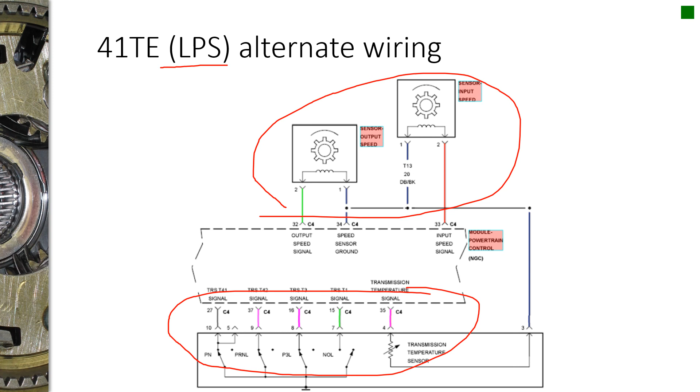The solenoid's no different. We still have 4 solenoids: 2-4, low reverse, underdrive, overdrive. They're still controlled by the PCM, so there's really no difference there.

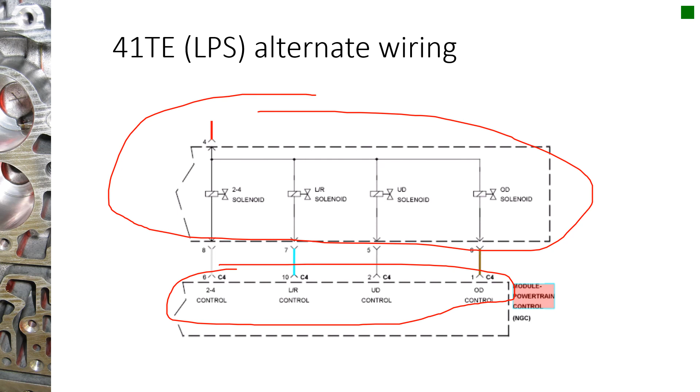Here's where we see a little bit of a difference. Now we've got our powertrain control module, and it's going to control what they call an assembly line pressure sensor variable force solenoid. Kind of a mouthful there, but we basically have a pressure sensor, not just a switch but a sensor, and we also have a solenoid.

We're going to have the ability of controlling a solenoid to alter the pressure in the transmission, and then we're going to have a sensor in there that's going to be able to monitor the pressure just so they can control the solenoid properly. It's a feedback type system.

This information is going to feed the computer with the pressure that we have. The computer is going to change the duty cycle, whatever it thinks it needs to be, for the line pressure solenoid. And if they got the pressure that they wanted, how would they know? Because the line pressure sensor will report whatever pressure the transmission is generating. So they can tweak their duty cycle to get what they want.